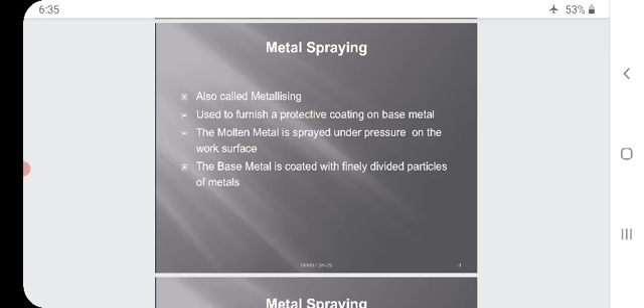Metal spraying is also called metallizing, used to furnish a protective coating on the base metal. The molten metal is sprayed under pressure on the work surface. The base metal is coated with finely divided particles of a metal.

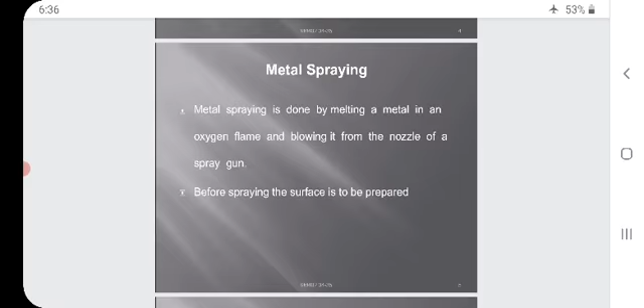Continuation of metal spraying. Metal spraying is done by melting a metal in an oxygen flame and blowing it from the nozzle of a spray gun. Before spraying, the surface is to be prepared.

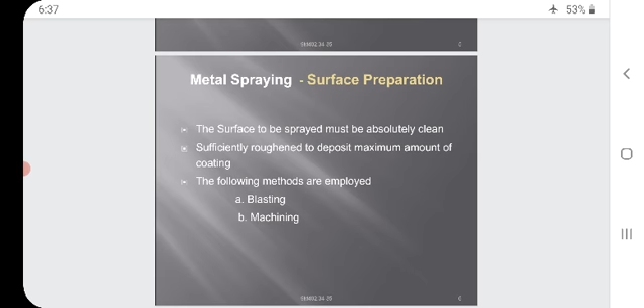Metal spraying, surface preparation. Before going to the metal spray, what we have to do? First, we have to go for the surface preparation. The meaning of surface preparation is nothing but to keep the particular work or the workpiece clean and neat. After that, we can go for the metal spraying. Few points regarding that we are going to see now.

The surface to be sprayed must be absolutely clean, and sufficiently roughened to deposit maximum amount of coating. The following methods are employed: blasting and machining.

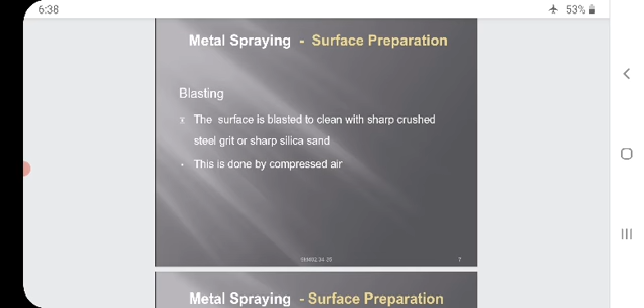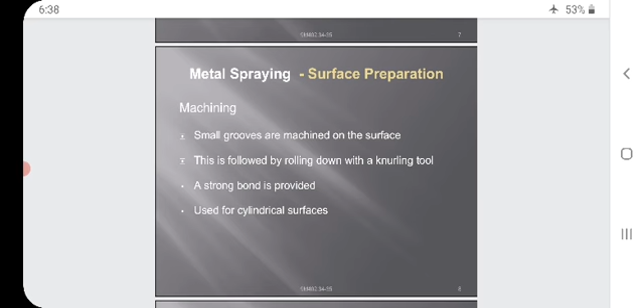Metal spraying, surface preparation, blasting. The surface is blasted to clean with sharp crushed steel grit or sharp silica sand. This is done by compressed air.

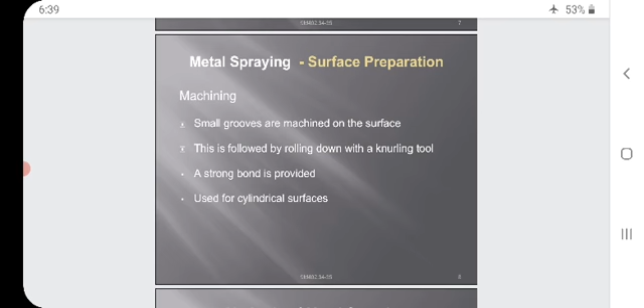Then come to the point of metal spraying - surface preparation, machining. Small grooves are machined on the surface. This is followed by rolling down with a knurling tool. A strong bond is provided. This is used for cylindrical surfaces. Mostly the surface preparation or machining methods are used for cylindrical surfaces only.

First we are going to discuss the wire method. What is the wire method and how is it done? Here in this process, the coating material is in the form of a wire. This wire is melted with the oxyacetylene flame.

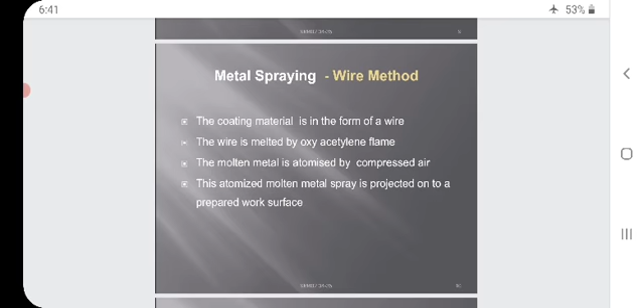We have heard of this oxyacetylene flame in the welding chapter. In welding also, we use the oxyacetylene flame along with the oxygen cylinder.

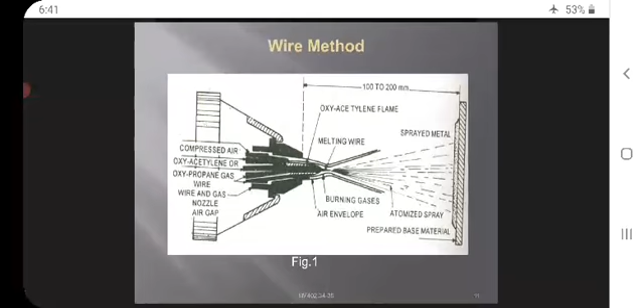The molten metal is atomized by compressed air, meaning it is divided into small parts. This atomized molten metal spray is projected onto a prepared work surface.

Wire method - this is the figure, I am making a zoom. The gap between the torch and the base material should be 100 to 200 mm.

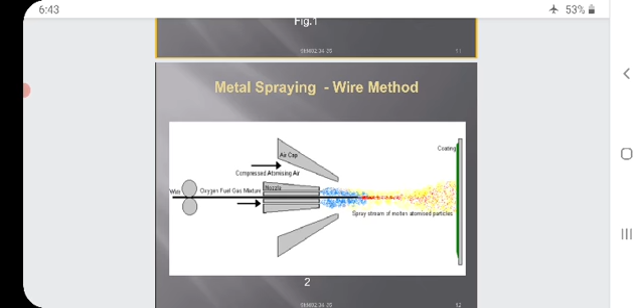Coming to the parts: oxyacetylene flame, melting wire, burning gases, air envelope, sprayed metal, atomized spray, prepared base material. On the left hand side: compressed air, oxyacetylene or oxypropane gas, wire and gas nozzle, and the air cap. So these are the main parts.

Metal spraying, the wire method. The wire which is kept in between the rollers - from the rollers, it is sent to the nozzle where the oxygen fuel gas mixture is present. At the top, you can see the air caps, from which high compressed air is sent.

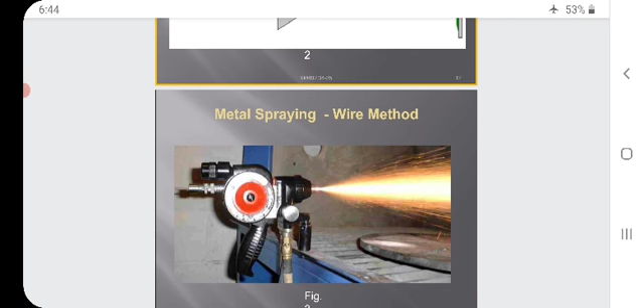On the screen, you are seeing the red, yellow, and bluish flames. That is nothing but a spray stream of molten atomized particles. The green color indicates the coating.

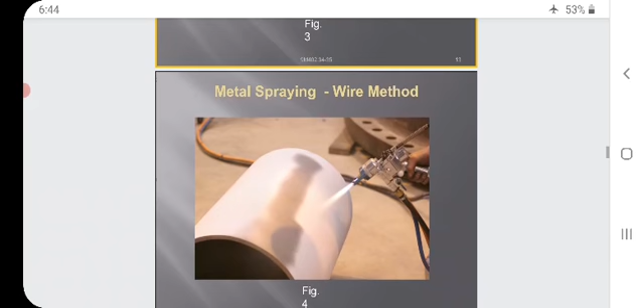A solid figure. This you can see in the screen. I will make a zoom.

Metal spraying by the wire method. For the cylindrical objects, a person is doing a spray, that is called metal spraying. This process is done with the help of the wire method. In the screen you can also see the torch, which is connected with the hoses.

In wire form, the metal is less expensive, more readily available, and easily handled. Gears are required to feed the wire.

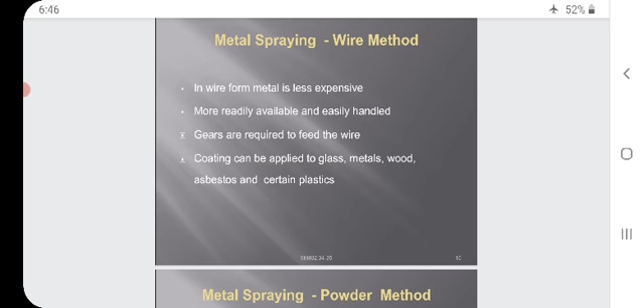Coating can be applied to glass, metals, wood, asbestos, and certain plastics.

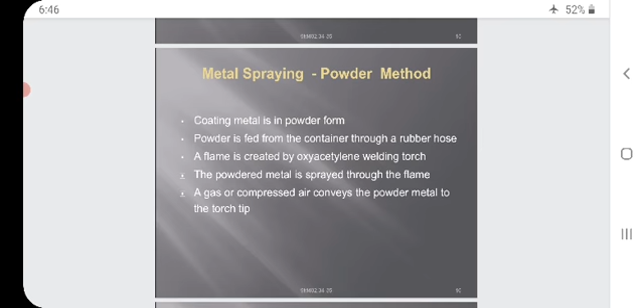After the completion of the wire method, we are going to see the powder method. Coating metal is in a powder form. What happens in the spray method? In the wire method, it is in the form of a wire. Here, this is in the form of a powder.

Powder is fed from the container through a rubber hose. A flame is created by an oxyacetylene welding torch. These topics are similar to gas welding only.

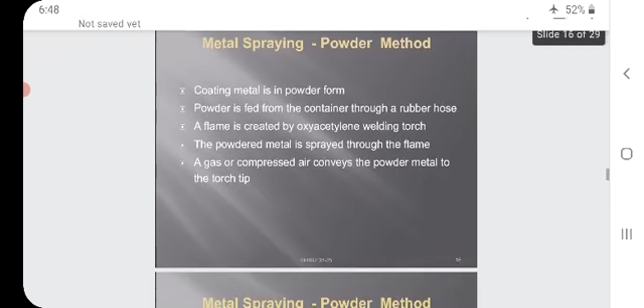Same points you can see here. A flame is created by the oxyacetylene welding torch. The powder metal is sprayed through the flame. A gas or compressed air conveys the powder metal to the torch tip.

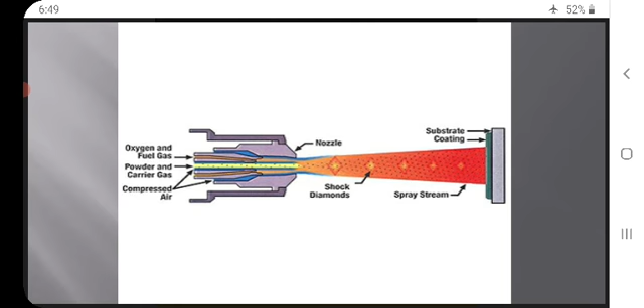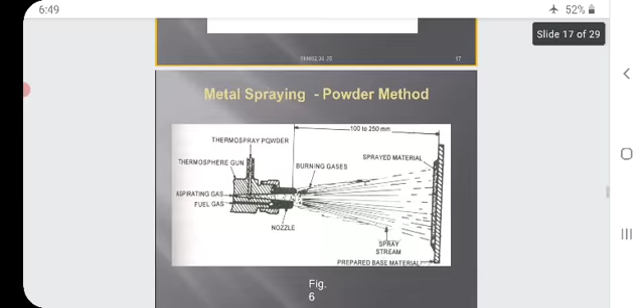Nozzle, oxygen and fuel gas, powder and carrier gas. At the bottom, both arrows indicate the compressed air which is coming from the air compressor.

Powder method. Here the gap should be 100 to 250 mm, that is from the nozzle attached to the work to be prepared. Sprayed material.

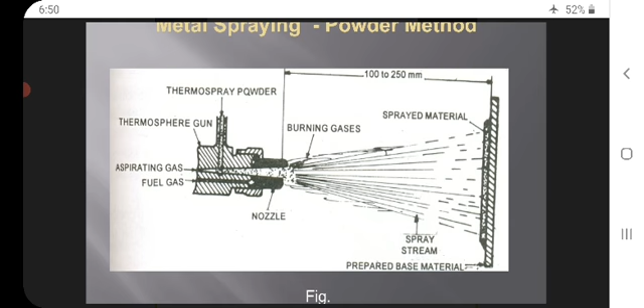The dotted particles indicate the spray stream. Burning gases coming from the nozzle, aspirating gas, other fuel gas, thermospray gun and the thermospray powder.

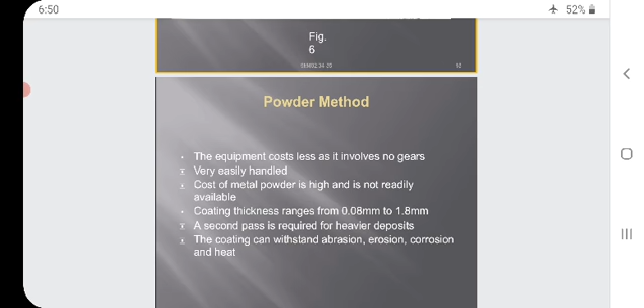I repeat: sprayed material, spray stream, prepared base material, burning gases, nozzle, aspirating and fuel gas, thermospray gun.

Powder method. The equipment cost is low as it involves no gears. The cost of equipment is low because it doesn't have gears. It is very easily handled, comparing with the wire method.

Cost of metal powder is high and is not readily available.

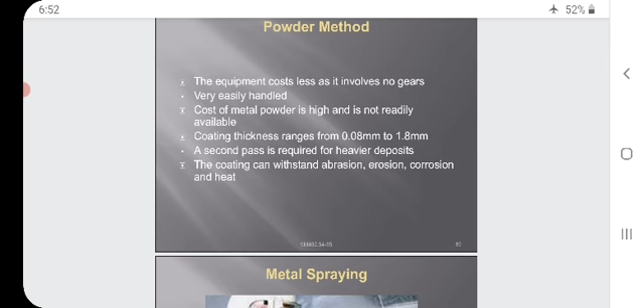Coating thickness ranges from 0.08 mm to 1.8 mm.

A second pass is required for heavier deposits. If there is a need for good deposition, a secondary pass is required. Most of the time we go for only a single pass.

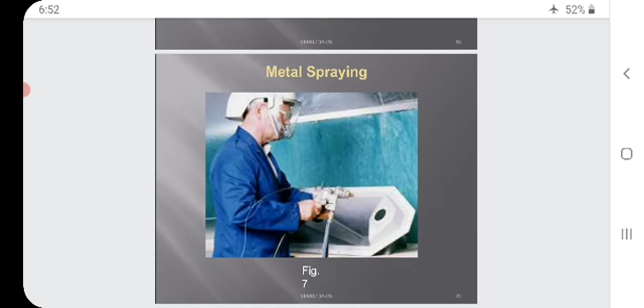The coating can withstand abrasion, erosion, corrosion and heat.

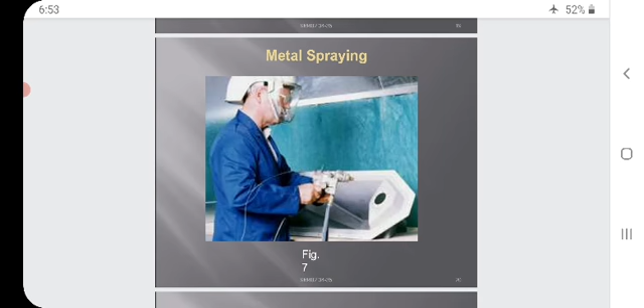On the screen you can see the metal spraying. A work person who wears a helmet using the spray gun. This is the process of metal spraying.

Applications of metal spraying: widely employed in industries because of its economy, rapidity in production, and no distortion of work.

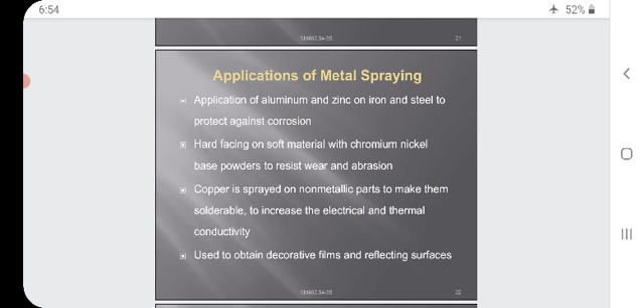Work surface is free from internal stresses.

Applications of metal spraying: aluminium and zinc are applied on iron and steel to protect against corrosion. So, to protect against corrosion for the iron and the steel, we go for metal spraying of aluminium.

Hard facing of soft material with chromium nickel base powders to resist wear and abrasion.

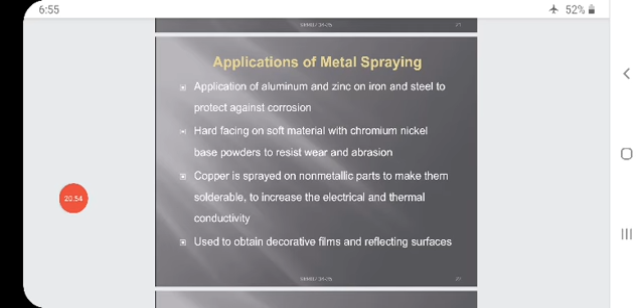Copper is sprayed on non-metallic parts to make them solderable, and to increase the electrical and thermal conductivity.

It is also used to obtain decorative films and reflective surfaces.

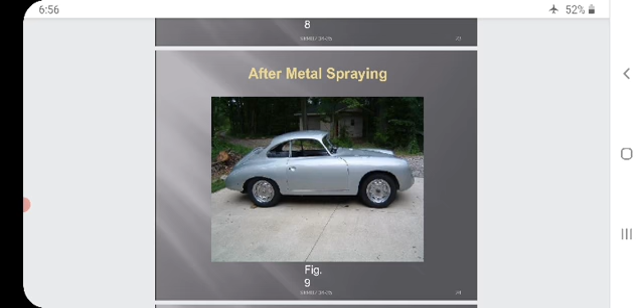Up to now, we have seen the principle of metal spraying, surface preparation, methods of metal spraying - the wire method and the powder method - and its applications.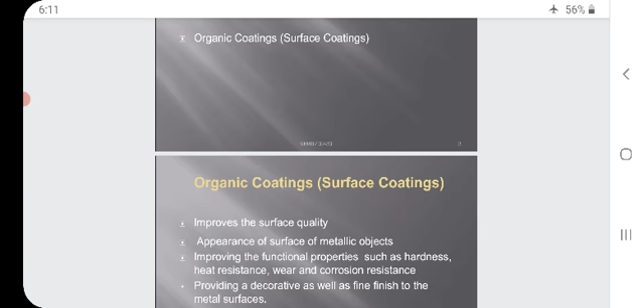In the last class, we discussed regarding hot dipping, galvanizing, parkerizing, tin coating, and the advantages and disadvantages of such coatings.

Now, we are going to see regarding organic coatings, or surface coatings. Organic coatings are the surface coatings. We are going to see some points regarding organic coatings. It improves the surface quality - what it will do is improve the surface quality.

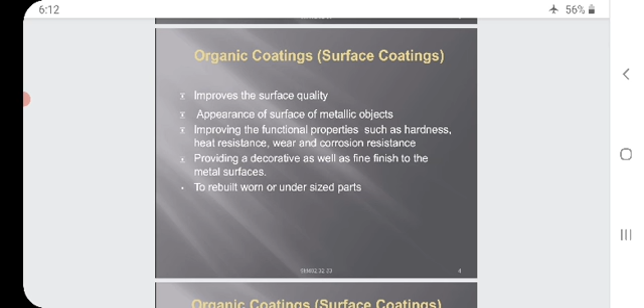Appearance of surface of metallic objects. If you go for the organic coatings, the surface of the metallic objects will get a good appearance. Improve the functional properties such as hardness, heat resistance, wear and corrosion resistance. It improves the functional properties. What are those functional properties? They are hardness, heat resistance, wear and corrosion resistance.

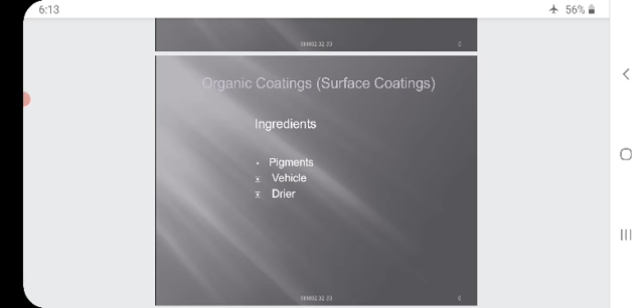Continuation: ingredients. What is the meaning of ingredients? Means what will mix in the organic coatings or the surface coatings. They are pigments, vehicle and driers. First, we are going to see the pigments. By adding pigments, what will happen? They have an effect on the appearance and color. They also improve the durability, that means the life, and strength of the film.

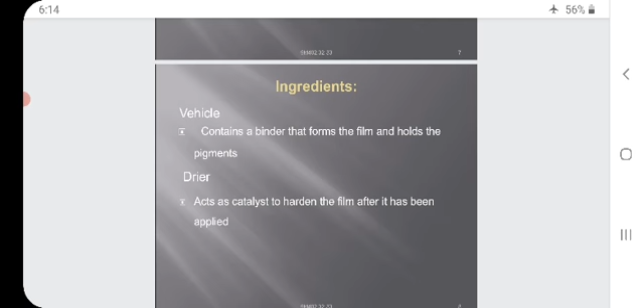Vehicle contains a binder that forms the film and holds the pigments. Drier acts as a catalyst to harden the film after it has been applied.

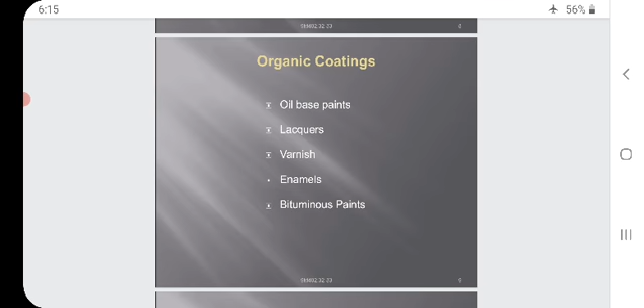Organic coatings. Some of the organic coatings are oil-based paints, lacquers, varnish, enamels, bituminous paints. I repeat once again: oil-based paints, lacquers, varnish, enamels, bituminous paints. First, we are going to see the oil-based paints.

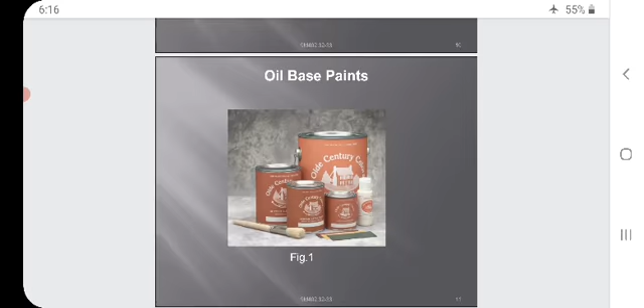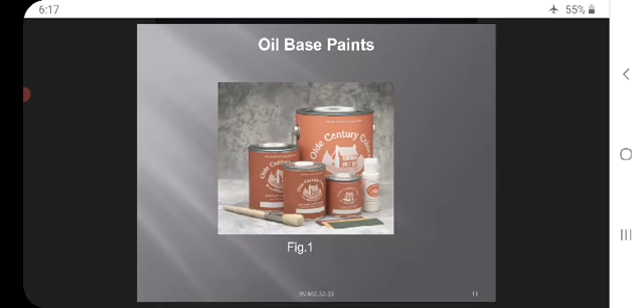It consists of linseed oil as vehicle, white lead and red lead as pigments, and thinner turpentine as solvent. Makes an excellent coating for wood. Sometimes used on steel structures. I repeat, it consists of linseed oil as vehicle, white lead and red lead as pigments, and turpentine as solvent. Makes an excellent coating for wood, and sometimes they are used on steel structures.

Oil-based paints. You can see the figure on the screen. I am making a zoom. So that is a paint can, which is in the maroon color. Oil-based paints.

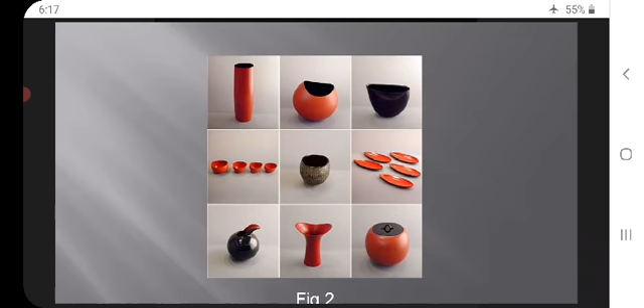Then come to the point of lacquers. They are quick drying coatings, lower coverage, durability of the film is poor. I repeat, they are quick drying coatings, that means they will dry very quickly, lower coverage, and durability of the film is poor. That means the life of this film is poor.

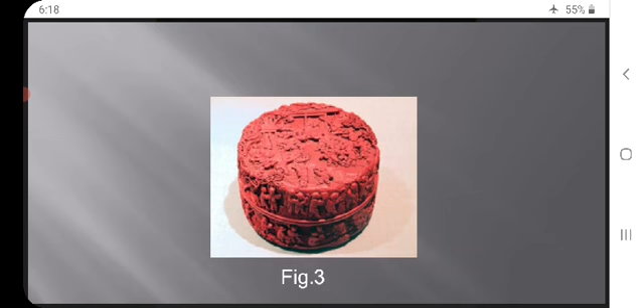Lacquers. These are examples of products which are made with lacquers. I am making a zoom so that you can see clearly. All these are coated with lacquers. This is also, see, lacquers.

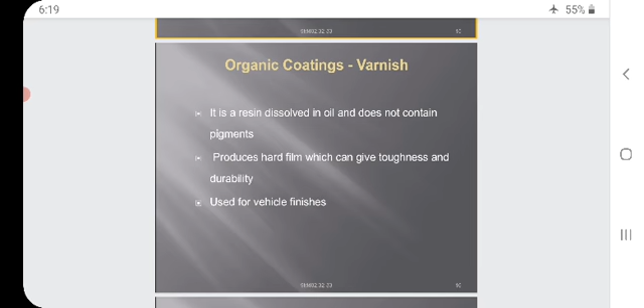Next, come to the point of varnish in the organic coatings. It is a resin dissolved in oil and does not contain pigments. Produces a hard film which can give toughness and durability. Used for vehicle finishes.

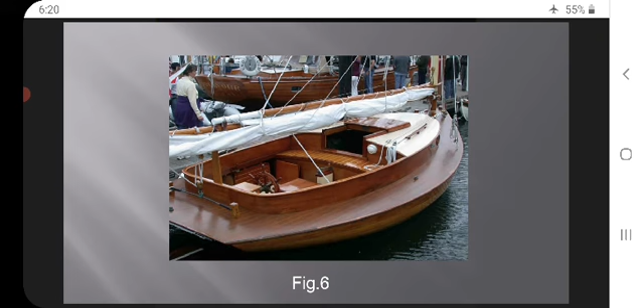This is a varnished surface. I am making a zoom so that you can see clearly. A boat. On the top of the boat you are seeing a wooden finish. They will be varnished so that they look very neat. Varnish.

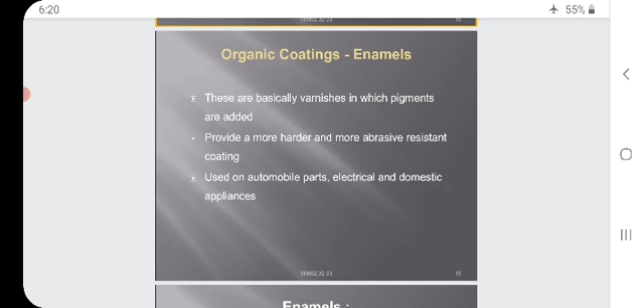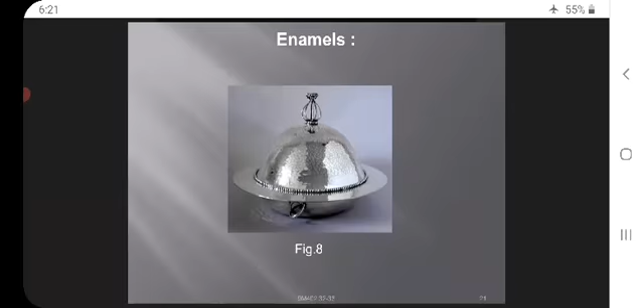Next, coming to the point of enamels. These are basically varnishes in which pigments are added. Provide a harder and more abrasion resistant coating. Used on automobile parts, electrical and domestic appliances. These are the surface coated enamels. This is also an example of surface coating enamels.

Next, organic coatings: bituminous paints. It is coal tar dissolved in a solvent. Provide a high resistance to water. Fillers are added when heavier coatings are needed. Excellent protection for submerged items. On exposure to sun, the film buckles and cracks.

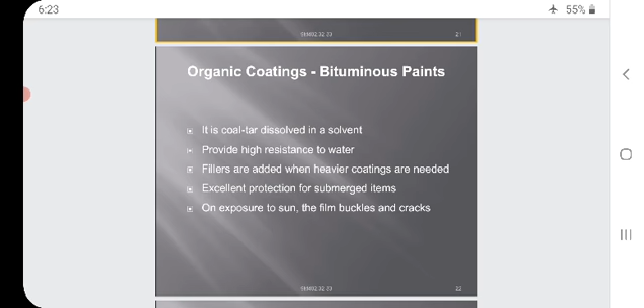I repeat, it is coal tar dissolved in a solvent. It provides high resistance to water. That means when bituminous paint is exposed to water, it does not get affected. So fillers are added when heavier coatings are needed. Excellent protection for submerged items, that is, products which are underneath the water. Those are called submerged items.

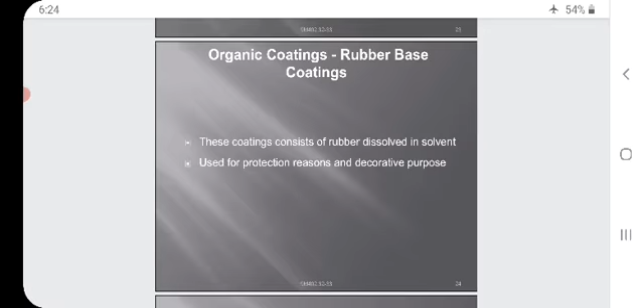Next, organic coatings. Rubber based coatings. These coatings consist of rubber dissolved in a solvent, used for protection reasons and decorative purposes. These coatings consist of rubber which is dissolved in solvent, used for protection reasons and decorative purposes. They are good for protection and for decorative purposes.

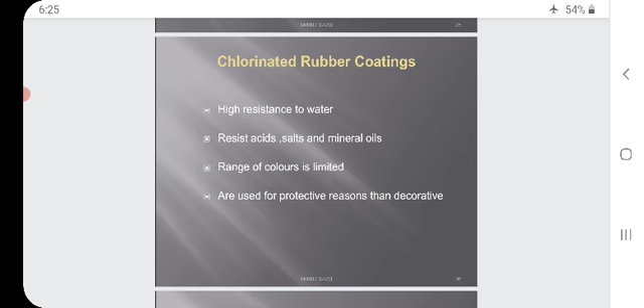Types of rubber based coatings are chlorinated rubber, neoprene, hypalon. I repeat, chlorinated rubber, neoprene, hypalon.

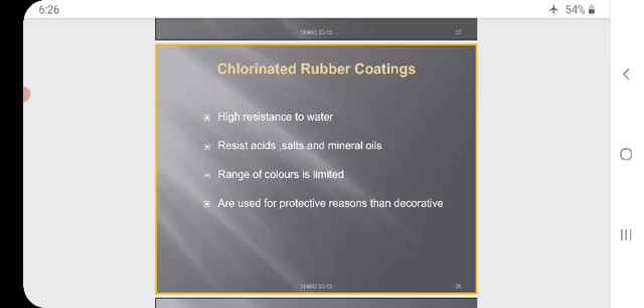Chlorinated rubber coatings. These have high resistance to water, resist acids, salts and mineral oils. Range of colors is limited. They are used for protective reasons rather than decorative.

I repeat, high resistance to water, that means when this chlorinated rubber coating is exposed to water, nothing will happen. It has a high resistance to water. It also resists acids, salts and mineral oils. That means when it is exposed to these liquids, it won't get affected.

Range of colors is limited. That means it won't have different colors, only limited colors. Used for protective reasons rather than decorative. We will use this mainly for protective reasons only rather than decorative.

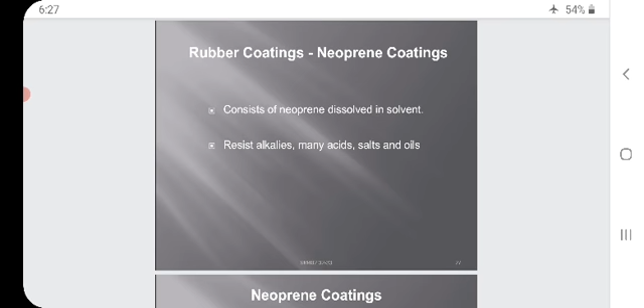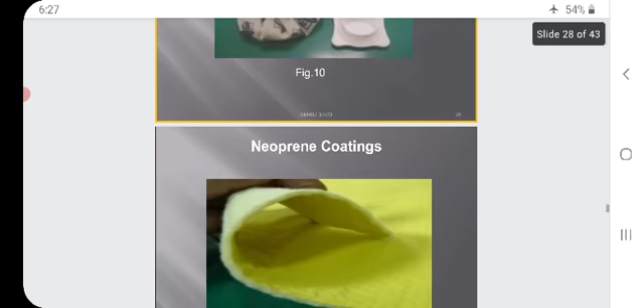Rubber coatings, neoprene coatings consist of neoprene dissolved in a solvent. It resists alkalis, many acids, salts and oils. It consists of neoprene dissolved in a solvent, resists alkalis, many acids, salts and oils.

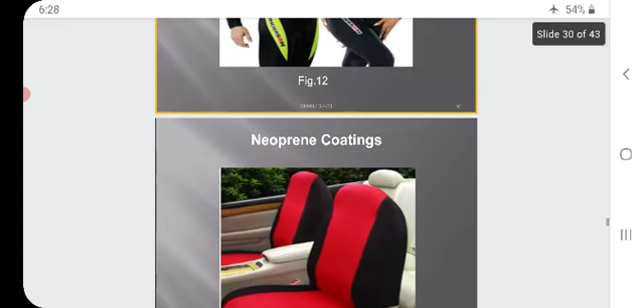So on the screen you are seeing the neoprene coatings. I am zooming in on the figure. Neoprene coatings. This is also a neoprene coating. See, this is a swimwear dress, neoprene coating. These are the examples. Neoprene coating on seats for cars or in buses.

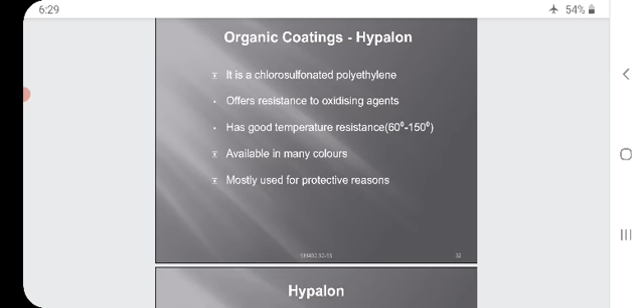Next, organic coatings. Hypalon. It is chlorosulfonated polyethylene. What is it? It is nothing but a chlorosulfonated polyethylene. Offers resistance to oxidizing agents. It offers resistance to oxidizing agents. Has good temperature resistance, that is 60 degrees to 150 degrees Celsius.

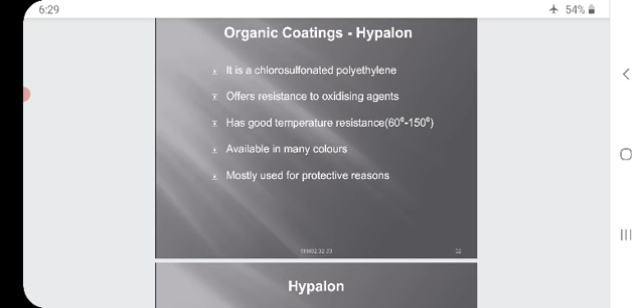It has good temperature resistance, 60 degrees to 150 degrees, available in many colors. When comparing with neoprene, those are limited, but here we can see different colors. Mostly used for protective reasons. These are also mainly used for protective reasons only.

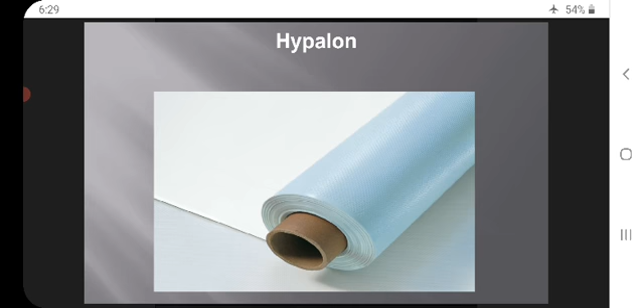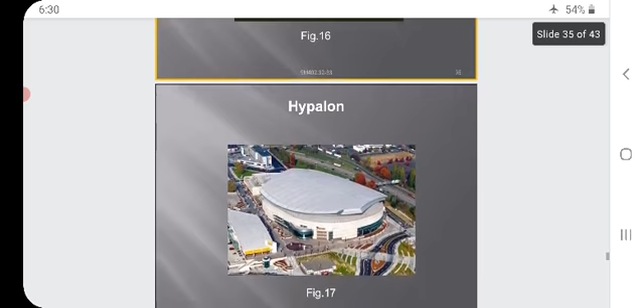See, this Hypalon sheet on the screen which is bending. Hypalon. This is also an example of Hypalon. I am zooming in so that you can see the figure clearly. Hypalon. See, this is an indoor stadium, for the outer covering. Hypalon.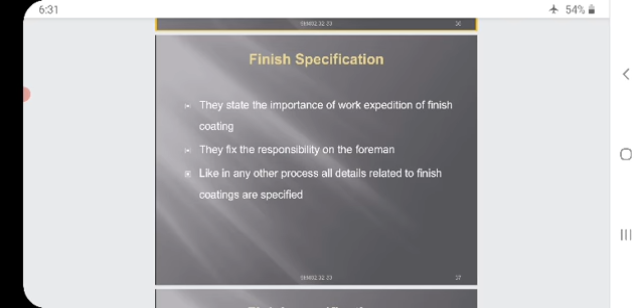Next, coming to finish specification. Finish specifications state the importance of work expedition of finish coatings. They fix the responsibility on the foreman. Like in any other process, all details related to finish coatings are specified.

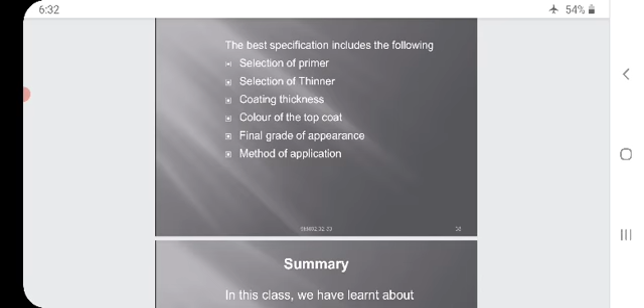The best specification includes the following. Now we will see them. Selection of the primer, selection of the thinner, coating thickness, color of the top coat, final grade of appearance, method of application. I repeat, selection of primer, selection of thinner, coating thickness, color of the top coat, final grade of appearance, and the method of application.

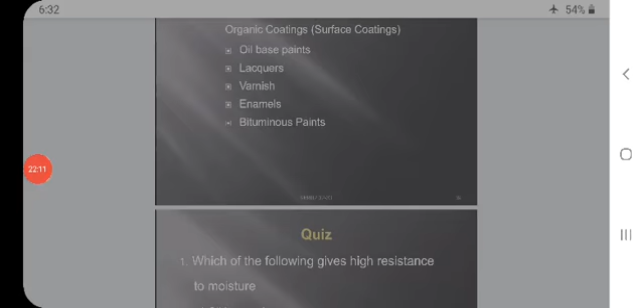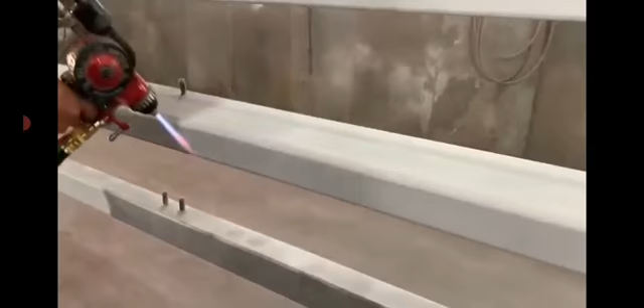Up to now we have seen the organic coatings, surface coatings. These are oil based paints, lacquers, varnish, enamels, bituminous paints. Now we are going to see different spray methods. These videos I have taken from YouTube for your understanding.

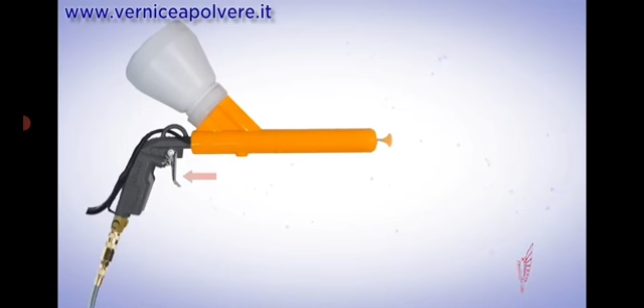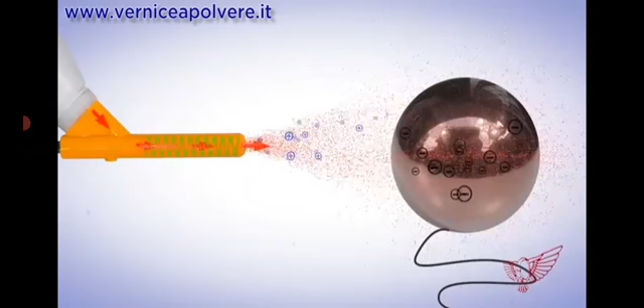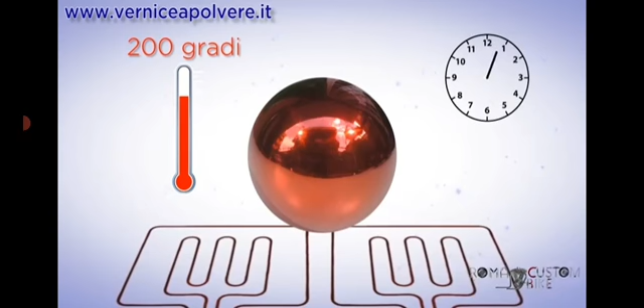This is how powder coating works. The actual powder is made out of polyester and pigments and is placed inside the gun's hopper. Once the air line from the compressor is attached, by pressing the trigger, the compressed air propels the powder through the barrel of the gun. Here the paint is positively charged by an electromagnetic coil up to 50,000 volts. At the same time, the part to be coated is grounded through a wire and negatively charged. Consequently, it attracts the polarized powder, retaining it and somewhat self-leveling it.